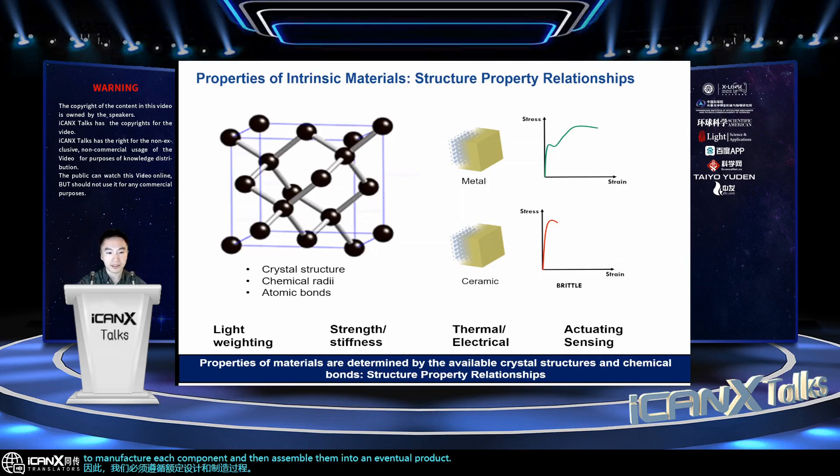And as such, we have to follow iterative design and manufacturing processes to manufacture each component and then assemble them into an eventual product. Okay, so what if in the future we don't have to be limited by these limitations? What if in the future we can start with any desired behaviors or properties that we want? So you can start, for example, by designing a load displacement curve for how you want a material to behave, or electromagnetic properties that change with time and space, and then leave the rest to computational design, artificial intelligence, and manufacturing processes that output a product that behaves exactly how you want it to behave. So how could that be possible?

That really needs us to develop manufacturing capability to assemble these three key elements. The first one is we need to have the ability to assemble materials into any desired three-dimensional topology. The second element is we want to have the ability to control feature sizes across multiple length scales. And the third and also extremely important element is we want to be able to assemble different functionalities or material classes into that digital platform. And that really comes into the concept of metamaterial.

So metamaterial is an engineered material that has properties that go beyond their raw materials. And then you can really define your own properties from these metamaterials. So it really feels like a fabric, as a continuum material, but you can define all these new properties that transcend the limitation of the raw material behavior.

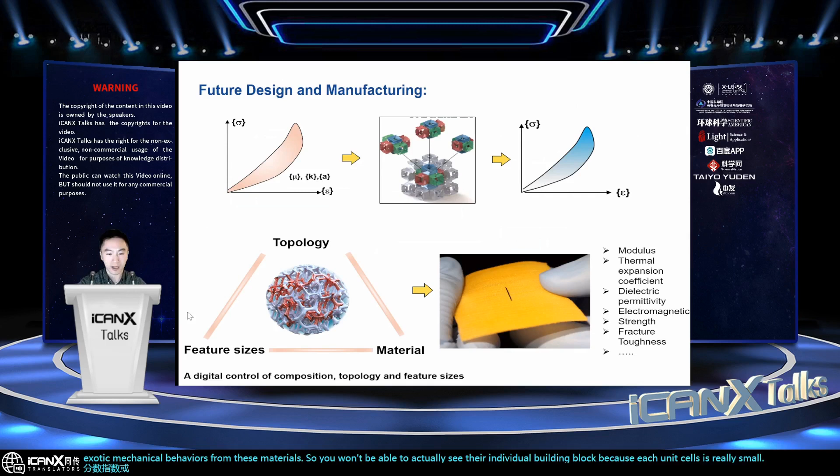For example, you can have negative thermal expansion coefficient, negative index of refraction, or exotic mechanical behaviors from these materials. You won't be able to actually see their individual building block because each unit cell is really small. So that's really the overall concept of metamaterial that has been developed in the past, I would say, 30 to 40 years.

And so our work really started with the field of mechanical metamaterials. This is the work that I developed when I was a postdoc at Lawrence Livermore National Lab. This was the first mechanical metamaterial that was ever printed. This metamaterial is ultra lightweight. As you can see over here, it weighs less than 10 kilograms per cubic meter.

This means it is 100 times lighter than water, but it is able to support more than 10,000 times its own weight, while having almost zero deformation as compared to a steel foam, which is much heavier than these microlattice structures, but already deforms, as shown here.

So these extreme mechanical behaviors really come from the internal architecture that we can design at the micro and nanometer length scale. The individual building block is a microscale unit cell. We call that a stretch-dominated mechanical metamaterial unit cell. It is designed in such a way that no matter how you load it from any direction, all the structural members will only carry axial stresses. That's how you can make a material really stiff.

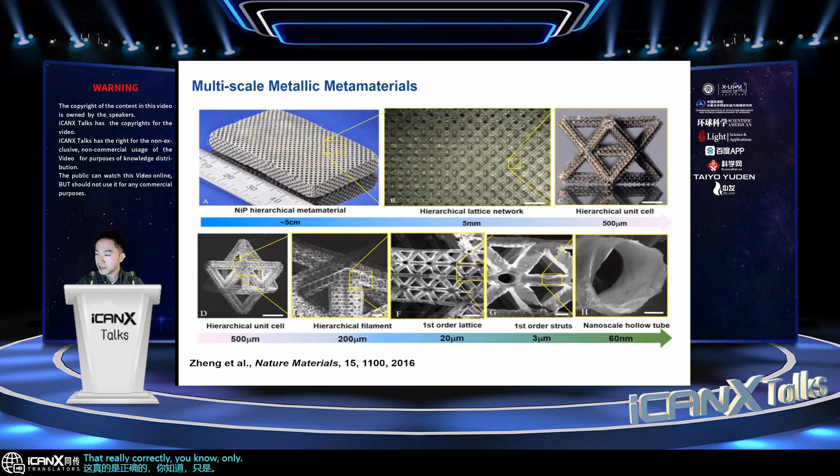The smallest length scale is a few microns, with feature sizes down to tens of nanometers of metal wall thickness. You can see this metamaterial is comprised of smaller metamaterials, and each smaller metamaterial block is comprised of an array of these stretch-dominated units. That collectively gives you not only rigidity, but also high recoverability over multiple cycles.

This is an example of a metallic metamaterial being compressed to over 90% strain, and you don't really see any fracture or plastic behavior. Unlike when you compress a can of Coke, this metamaterial can always recover no matter which loading direction you apply the force. This is the first demonstration of an ultra stiff but also recoverable metallic metamaterial.

This is really attributed to a collection of stretch-dominated designs over multiple length scales, and you can actually trigger different buckling loads at different length scales.

Okay. I'm sure most of you have heard the exciting talk given by Professor Joseph DeSimone from Stanford a couple of weeks ago on stereolithography-based techniques. There are all different 3D printing techniques that can make metamaterials. A light-based technique is one of the most suitable because it can give you small feature sizes and complex geometry. This is a technique that we developed at Lawrence Livermore National Lab. The baseline technique is projection microstereolithography.

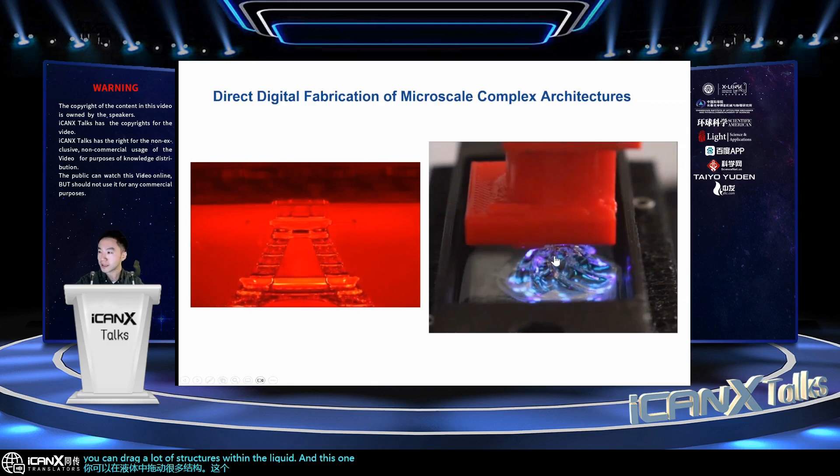Okay, so here's a movie showing the process. So you can have both bottom-up or top-down versions of this light-based 3D printing technology. So here's a top-down system where you shine the UV light from the top, and then you can actually use the elevator. So the elevator is the stage, and then you just lower it, and you can draw lattice structures within the liquid. And this one, similar to the CLIP technology that you see, you can actually lift solid lattice structures from bottom up.

So this is the baseline technique, but also in my lab, we really actively develop different embodiments of the technologies. We really focus on customization of these light-based 3D printing systems to make them process features across multiple length scales, as well as printing material that is highly viscous and functional. So it's one of the key focuses in my research group.

And also the ability to combine different materials, not only materials with different colors, different mechanical properties, but also materials that may come from different material classes or functionalities. So although the baseline technique can only process polymer, through advanced material feedstock synthesis or post-processing, you can convert this single material into other materials as well. So here's the polymer, but in that paper, we also show that you can do metal deposition and etch away the polymer, leaving behind metal lattices, or even graphene metamaterial.

So this is an example of a graphene metamaterial that one of my first PhD students, Rayne, demonstrated, where you start with graphene oxide and you print them into a green body, and then you do pyrolysis and burn them into a three-dimensional graphene architecture, where each ligament is comprised of woven graphene sheets.

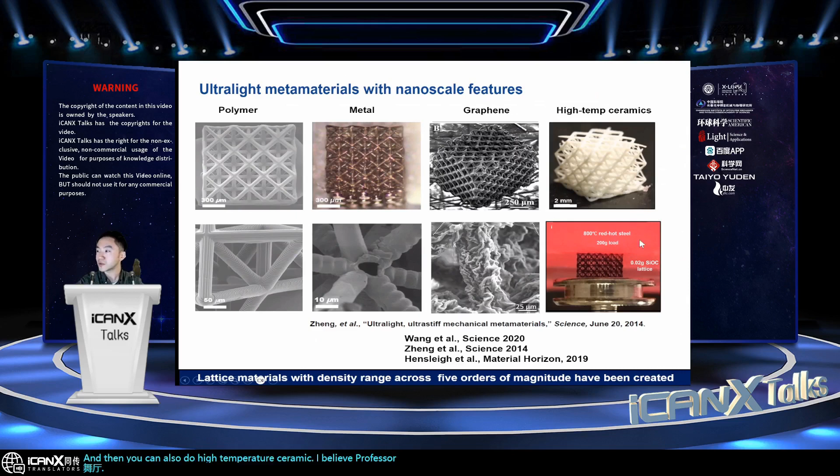And then you can also do high temperature ceramic. I believe Professor Joseph DeSimone also demonstrated the possibility with CLIP technology. So you can do silicon oxycarbide, silicon carbide, all different types of high temperature ceramic. So that is the baseline.

But we're also very interested in looking at how you scale up these metamaterials and what will be the eventual property limitations. And from an engineering practice point of view, how can you design metamaterials that have the desired failure load or fracture toughness? So this is a really difficult mechanics problem that has intrigued multiple mechanics people in the past 50 years.

So here's an example of probably the largest metamaterial that has ever been fabricated. So it's a metamaterial that, you look at it, looks like a cheese box, but it really has more than 10 million unit cells. And then we've been collaborating with Professor Vikram Deshpande from the University of Cambridge, one of the world's best mechanics experts.

So we're really interested in studying the fracture behavior of these metamaterials. So it is really important when designing materials with limitations. For example, what is the damage tolerance? If you have a crack inside the materials or any type of defect, how do they behave? So you really need an advanced tool to really visualize these failure modes.

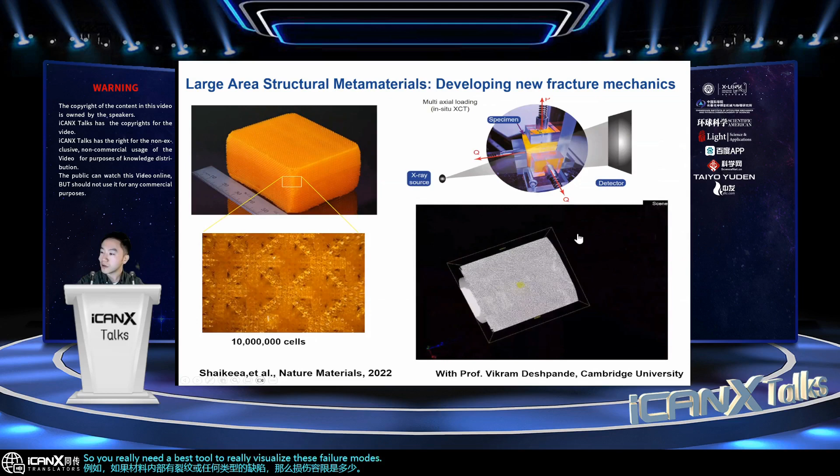So we collaborate with Dr. Vikram Deshpande very closely on really looking at the in situ loading, and then looking at how the crack can propagate and what are the failure modes and mechanics laws governing the fracture behavior of this metamaterial, and whether we can define new mechanics that define the failure behavior of this material.

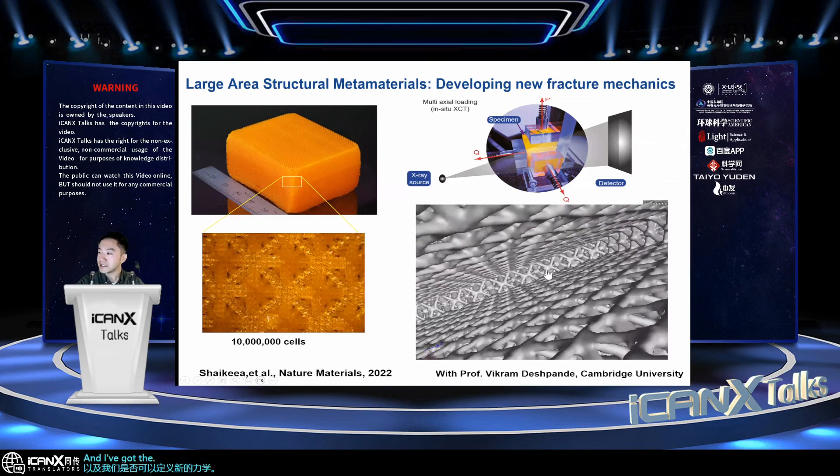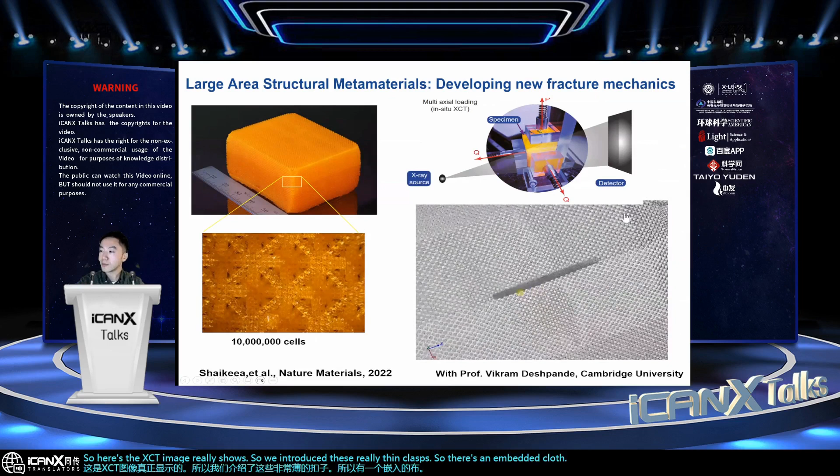So here's the XCT image that really shows, so we introduced these really thin cracks. So this is an embedded flaw that we introduced, and then apply uniaxial or triaxial tensile experiments and look at the failure mode. So long story short, we really observe very different and exotic mechanical behavior that you don't really see in continuum materials.

So one example being these metamaterials: we intentionally made the raw material, which is the base polymer, to be an elastic brittle material. So an elastic brittle material is a material where, when you have a crack and you load it, it will fail catastrophically. But what we really observed lately is they really don't fail catastrophically.

So they experience an R-curve behavior, which is similar to the bone in our body or a biomaterial. So with a biomaterial, when it has a flaw and you try to stretch it, the crack will not propagate immediately, but the crack will actually change its shape and display a really ductile behavior.

So we're really intrigued by this study, and then realized you can see that these metamaterials, despite being made out of brittle material, actually have a very strong ductile behavior, meaning that the crack does not really catastrophically propagate. It actually keeps changing its shape and adapting. So this is a new work that we have recently submitted.

And in the earlier work, our collaborator, Angkur, who is also now a professor at the University of Cambridge, and also my student, Huachen Cui, who has graduated from my group and is now assistant professor at Hong Kong University of Science and Technology, we have figured out a design criteria for these types of metamaterials. So eventually, when you scale up from a few microns to meters or tens of meters level, what are the failure criteria governing these mechanical metamaterials?

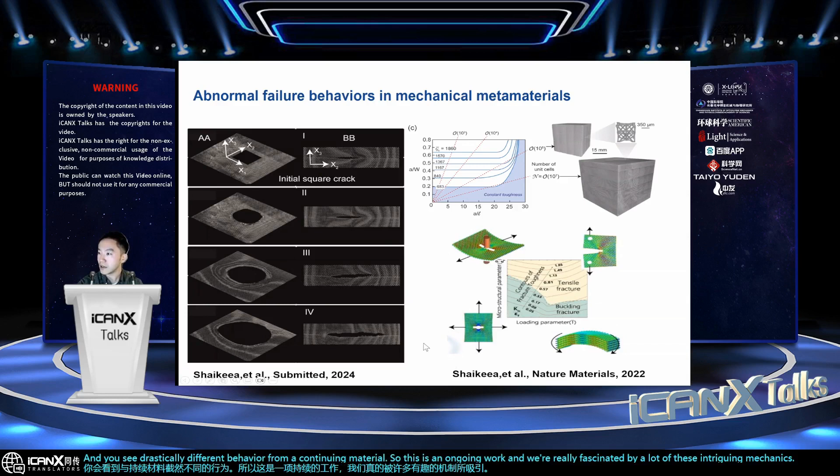So we can also introduce mesoscale control within these hierarchical metamaterials. For example, you can also introduce carbon fibers. So here's a setup that we have developed that allows you to scale up these metamaterials to meter level with microscale features with embedded carbon fiber.

And recently, my postdoc, Qi Chen, has also achieved the alignment of these micro carbon fibers within these metamaterials so that in each ligament, you can have these fibers aligned in 3 dimensions, meaning that all these fibers can be aligned along the axial direction of these trusses so that you can maximize the mechanical properties as well as tailor their anisotropy of stiffness at different loading directions.

Okay, so the real benefit of these mechanical metamaterials is the design opportunities. For researchers who have been investigating mechanical metamaterials, you see that these metamaterials, when you load them, have really interesting mechanical behavior, and that mechanical behavior for any material is displayed by its stress strain curve. And for mechanical metamaterials, with this topology design, you can have really interesting exotic stress strain curves

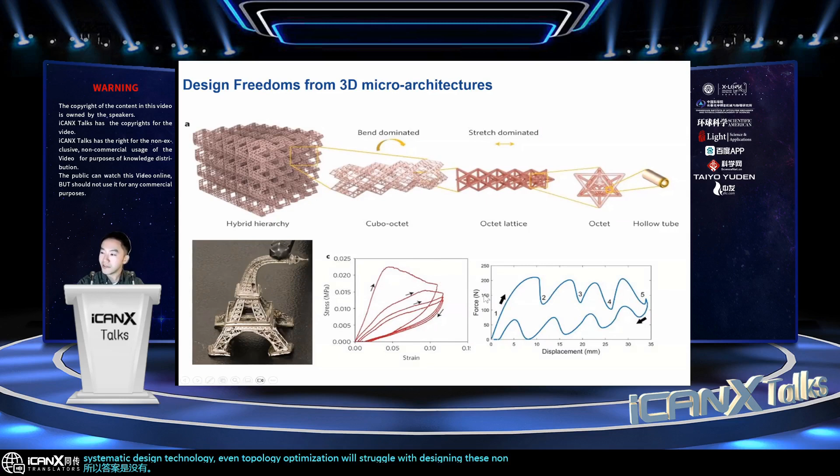and tailorable energy absorption behaviors. So then the question is, with unlimited design possibility across multiple length scales, how can you actually design them? The answer is there has been no systematic design technology. Even topology optimization will struggle with designing these nonlinear mechanical behaviors. So we resort to machine learning to design metamaterials. This is the work that my postdoc Chen Hua first investigated.

So our concept is you start with the designer. Let's say the designer is a front-end engineer or a customer. You come up with your desired mechanical behavior. So let's say you can draw a stress strain curve, which can also be a force displacement curve, of the material behavior you intend to have.

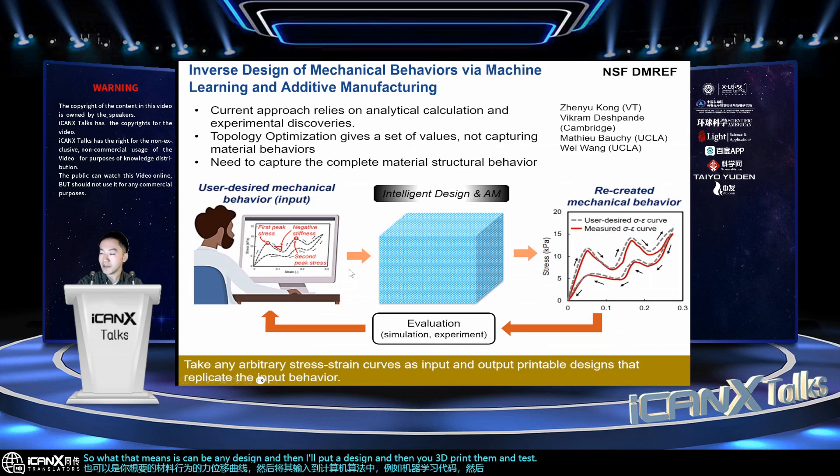And then you input that into a computer algorithm, for example, machine learning code, and then output a metamaterial. So here I just draw a block. What that means is it can be any design, and then it outputs a design, and then you 3D print them and test them. It can actually replicate the intended behavior. So we leave the rest to machine learning development.

So currently my postdoc Marco has been leading this project on designing a graph neural network. This is a multidisciplinary and multi-university collaboration that I lead with UC Berkeley and UCLA to use graphs. A lot of people have been using graphs to represent molecular architecture, but here we actually use these graphs to uniquely represent the geometry and the topology of metamaterials.

So here the graph is a really unique mathematical language, and we find out that you can actually use the node feature and the edge feature of the graph to represent the entire information of metamaterials in terms of their geometry, the topology, even the material and the density of metamaterials. So with graphs, you can come up with any random architectures by placing the nodes and edges, and then iterate them and construct a neural network.

Then you can train the surrogate model, which gives you the prediction of any of these graph models, and eventually achieve the inverse design of metamaterials. Here are some of the examples. So we can not only do metamaterial design at low frequency quasi-static response, but also high loading rate, as well as even dynamic properties and acoustic properties.

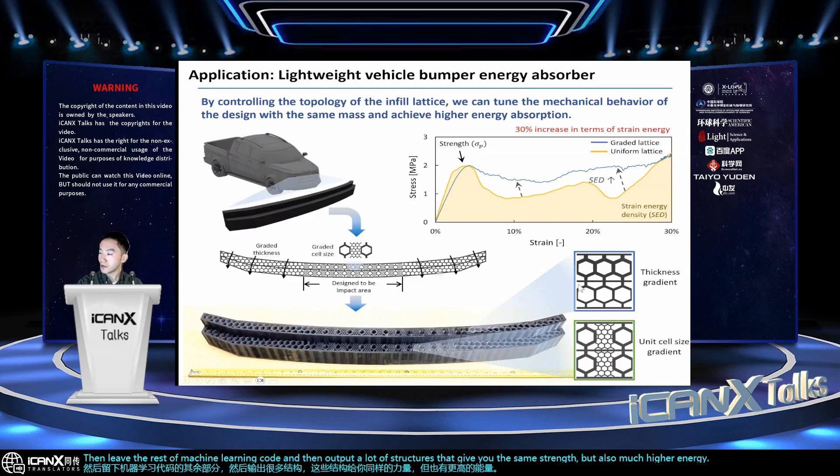What you really want when the car hits a pedestrian at a high loading rate is to minimize or keep the same strength, the stress, so that minimal stress is transmitted into the human body, but have really large energy absorbed by the car bumper. So here you look at the stress-strain curve from a baseline design, tailor the shapes, then leave the rest to the machine learning code, which outputs lattice structures that give you the same strength but much higher energy absorption. My student Zheng has demonstrated the prototype in our lab.

Okay, so that's enough about the structural materials that I want to talk about today. Now I want to switch gears a bit to look at how we can go beyond mechanical metamaterials and structural applications. This is actually true for additive manufacturing in the past two decades. Most additive manufacturing approaches have focused on structural materials: metal, polymer, plastics, and ceramic or composite at most. But it is really difficult to combine functional or electronic materials into additive manufacturing. That's because you always have to introduce a binder, the material that can be shaped, which gives you a trade-off in material functional properties. So there's a trade-off between manufacturability and functionality.

So we have been at the forefront of developing exotic functional or electronic materials into the building blocks of metamaterials. And we are excited to explore what happens when you combine different functional or electronic materials into the three-dimensional architecture of the metamaterial: what are the new design spaces, functional behaviors and even applications that you can derive from this layout.

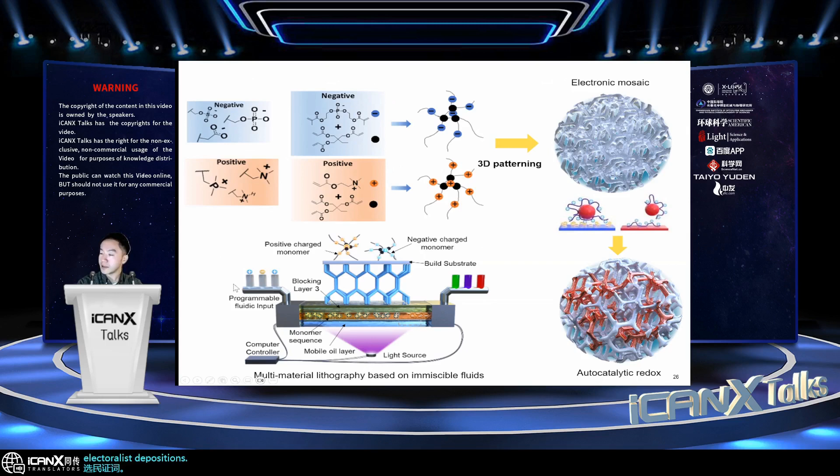So this scaffold is really a three-dimensional assembly of electrostatic charges at each different region. You can have negative charges or positive charges. And then you can use them as a scaffold to attract different material depositions. So here's an example where you can use this opposite attraction principle to attract different material plating. So it's eventually a selective volumetric electroless deposition. And then you can carry them out with our multi-material platform.

And here are examples of three-dimensional architectures you can do with this technology. For example, this Eiffel Tower, you've probably seen before from Professor Joseph DeSimone. But here, within this Eiffel Tower, at any location, you can have a different material. So for example, at a selected region, you can have a metal layer. It can be any metal: copper, nickel, silver. The example here is a nickel dielectric architecture.

This is a gyroid architecture, an interconnected dielectric material, which is the polymer here, and then the nickel phase, which gives you this interpenetrated inorganic and organic material combination.

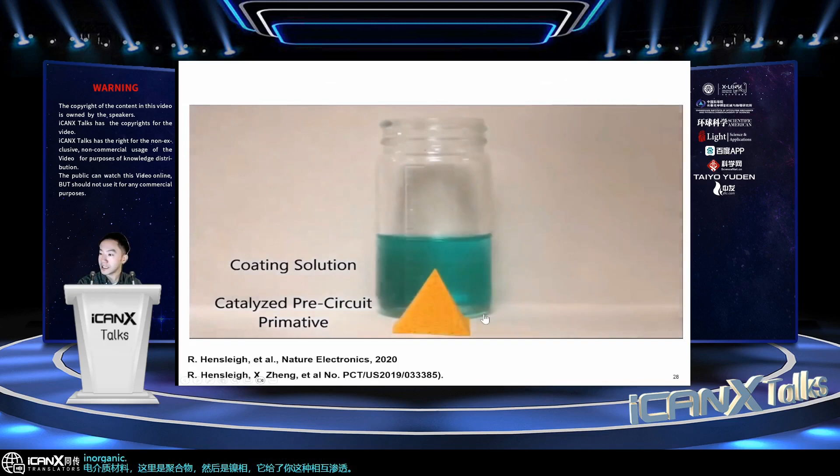And here I show a quick movie of the platform. You start with a 3D printed material that carries these charges, and then you put it into a solution. This is any conventional electroless plating solution. And then within a minute, you take it out, and you get a nice three-dimensional circuit pattern. So this is the interconnect we show on surfaces with any topological complexity. And you can do this really fast; it only happens within a couple minutes.

So it's not only compatible with metal, but it can be applicable to other functional materials: oxides, magnetic materials, or some semiconducting materials as well, even carbon nanotubes. This really gives you the ability to make building blocks comprised of different materials. You can tune the conductivity distribution in 3D, as well as the dielectric constant distribution in 3D.

So when you have alternating dielectric and conductive phases, one immediate application that we have thought about is electromagnetic wave steering, which is electromagnetic metamaterials or microscale antennas that can operate at gigahertz frequencies. Most antennas used today in your cell phone for communication are basically used to collect radio waves and then send those radio waves in different directions as you wish.

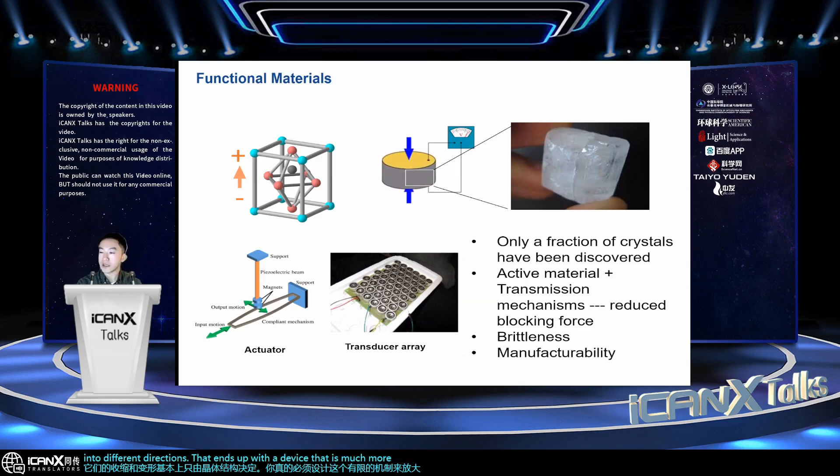So unfortunately, this material is extremely brittle and hard to fabricate. And as such, when we use them, we are limited by these base material properties. You have to make an array of small piezoelectric discs for different applications, for ultrasonic applications, for sensing, relying on arrays. Or if you use them for actuation, because their contraction and deformation is basically only dictated by the crystal structure, you really have to design a compliant mechanism to magnify the displacement into different directions. That ends up with a device that is much bulkier, and you have really limited degrees of freedom to work with.

Yeah. So now we're looking at, okay, what if we can actually introduce these piezoelectric nanocrystals with three-dimensional architecture, such that you can design architectures that go beyond these natural crystal behaviors. Here I showed examples of just a few crystal structures from nature of these piezoelectric crystals. This is pretty much what you can do with natural piezoelectric materials. So what if in the future we can design any arbitrary piezoelectric crystal tensors?

And first, you really need the ability to construct these piezoelectric building blocks into a metamaterial architecture. And then you really need to develop a fabrication printing technique to allow you to do that. So we have been working on this technology for at least the past 5 years, and we have figured out a way to make high quality piezoelectric materials.

So it started with a large quantity of these PZT nanoparticles, and you functionalize the surface and bind them with UV sensitive monomers, and then make it into a photocurable ink, which is basically a highly concentrated piezoelectric ink with these piezo nanoparticles in between our UV sensitive monomers, which basically serve as a binder. Then you can use your 3D printing technology to print them.

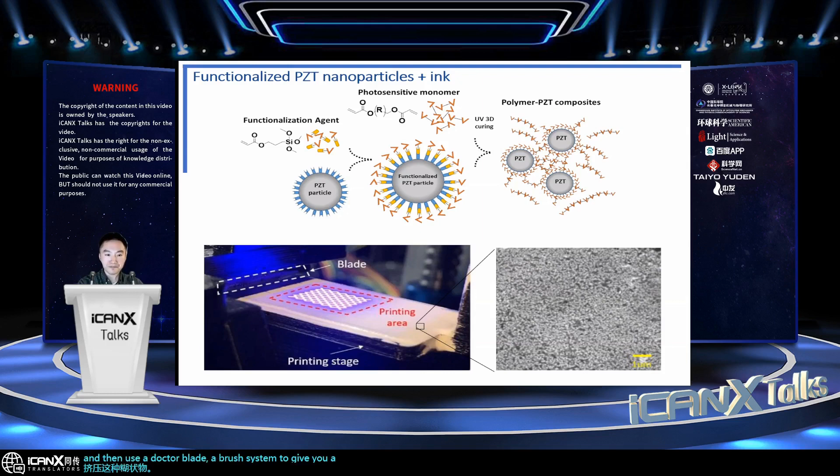So this makes this material really viscous, which gives us a lot of challenge to use a stereolithography-based system to print them. So we have to come up with a hybrid approach, which is you have to use a nozzle to squeeze this piezoelectric paste. So it's basically like a toothpaste. You squeeze this paste and then use a doctor blade, a brush system, to give you a really uniform layer of this piezoelectric colloid, then shine light on top and make your layer by layer fabrication.

So an example shown here: my student Hao Tian has introduced a liquid phase sintering technique that allows us to prevent a lot of lead from evaporation. And so here's the example of a post-sintering technique that we have developed that allows you to achieve very high density piezoelectric material post-sintering.

Combined with that, we also introduce an alignment approach that allows you to align these piezo crystal texture seeds into the material. And after templated grain growth, you can achieve a really high piezoelectric coefficient. Here's among the highest that we have achieved using this 3D printed textured ceramic. So this is really approaching piezoelectric crystal, and outperforming piezoelectric ceramics that you can even buy commercially. And then you can print them into any shapes and use them for both actuation and sensing applications.

So for the rest of the time, I'm going to talk about several energy conversion behaviors using these types of metamaterials. The first example I want to talk about is sensing. Sensing is a phenomenon we can use for metamaterials, which is to convert stress, mechanical deformation, into electric charges. So with these three-dimensional piezoelectrics, here's the example we show: if you print them into a cubic dimension, all these three blocks look exactly the same to you, right? But it's their internal architecture that we design that differs here.

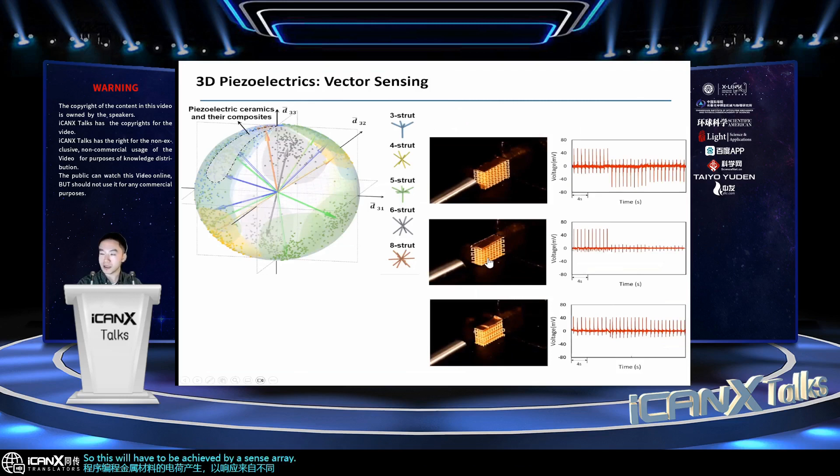So basically you can program the charge generation of metamaterials in response to forces coming from different directions. This would have to be achieved by a sensor array in current technology. But with metamaterials, you can just have one material building block and use it to give you a map of force distribution in 3D, not only the magnitude, but also the directionality of the force.

So this is the work of my past student Hua Chen, who is now a professor at the Hong Kong University of Science and Technology, and Zheng, also my senior PhD graduate, who developed these flexible piezoelectric metamaterials. You can tailor the polymer to be really flexible, and then with the piezoelectric and selectively deposited metal, make them into wearable structural materials. You can call them wearable electronics, but I also want to call them wearable structural materials with functionality.

So you can put them into a boxing glove. You don't want to do that, but my undergraduate students worked on this as a senior design project to make them into a boxing glove. What they demonstrated is that you put it into the boxing glove, you punch somebody in the face, and then you can read the real-time distribution of force magnitude along your palm, giving you the force at every individual pixel from these piezoelectric metamaterials.

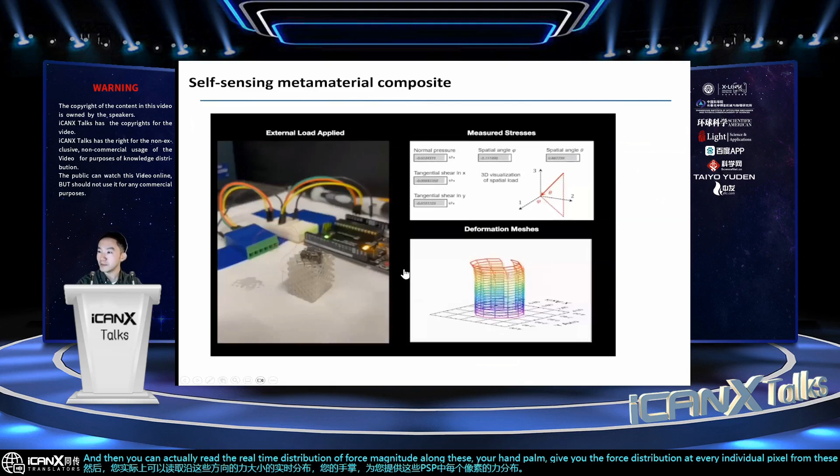So recently, my current PhD student, William, also demonstrated a self-sensing metamaterial composite. It's basically like an artificial fingertip; he tapped it from different directions, and you can measure the forces. This metamaterial can self-sense deformation in any direction and trace its shape when the fingertip is being deformed. So you can measure the shear force, the frequency, the normal forces, as well as the entire shape of the metamaterial being deformed.

Okay, so that's the sensing, which is the receiving capabilities I want to talk about. Now I want to talk about emission. So emission basically describes the property of metamaterial to convert electric voltages. So you supply electricity, and then it will emit vibrations. The vibration can range over different frequencies. One example here is ultrasound vibrations or low frequency vibrations.

So here we actually adapt these technologies. We've been collaborating with medical doctors at different universities on this technology. This is an example of a stent. People insert a stent into a catheter and insert it into the patient. But now we can also introduce piezoelectric materials locally. We can do coatings or print the whole piezoelectrics along each ligament of the stent, and then they can serve dual functions.

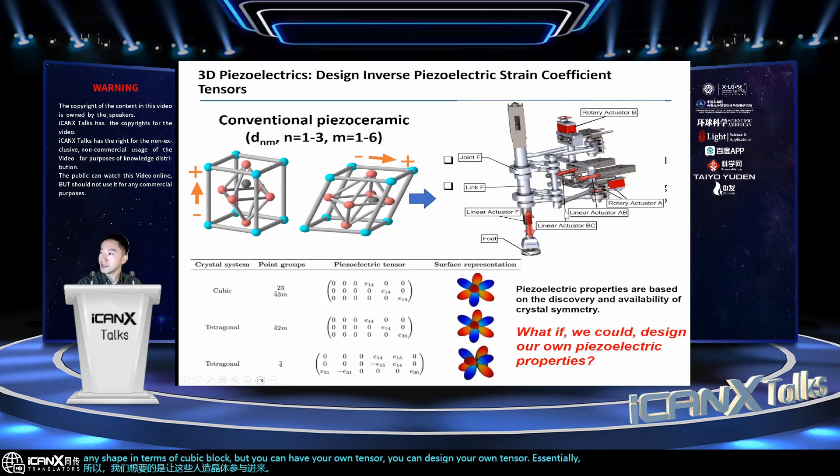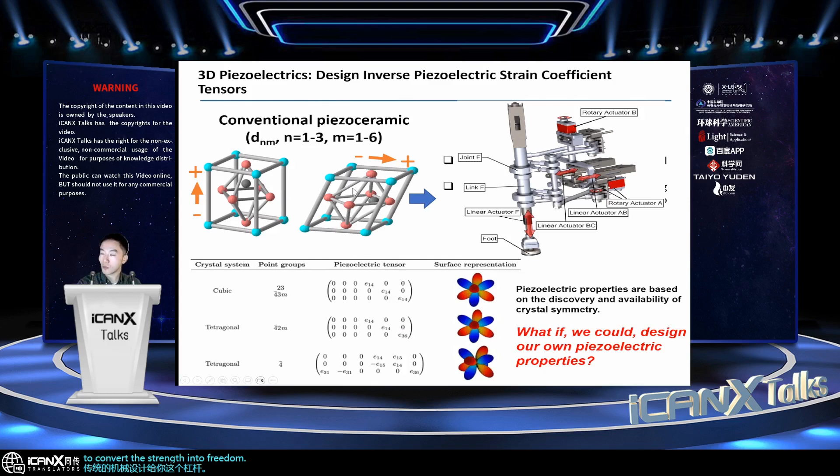You can design your own tensor in such a way that you don't have to use complex traditional mechanical design to give you levering to convert the strain in different degrees of freedom. This metamaterial itself will be capable of generating strain in different directions.

So this is from the work that my first PhD student, Huachen, demonstrated along with our collaborators: we can design metamaterial topologies by arranging the orientation of the piezoactive materials, as well as the passive structural phase, which can be the non-polarized ceramic phase, and conductive phases, to make a three-dimensional metamaterial architecture that can display all the different tensors you want to have.

So it's essentially an inverse design approach that allows you to tessellate the ligaments spatially in 3 dimensions, and you can also tessellate them in different coordinate systems, giving you a metamaterial building block that can convert strain in different orientations. I'm not going to talk about the detailed design; if you're interested, you can look into our paper published in 2019. This shows that you can achieve all different piezoelectric tensors, which really give you actuation properties.

So the same building block shape is a cube. If you apply a voltage, it can generate either pure shear or pure twist or a combination of deformations in different degrees of freedom. And we measure them experimentally. Here's an example using laser vibrometer measurement to measure the deformation of these metamaterial blocks.

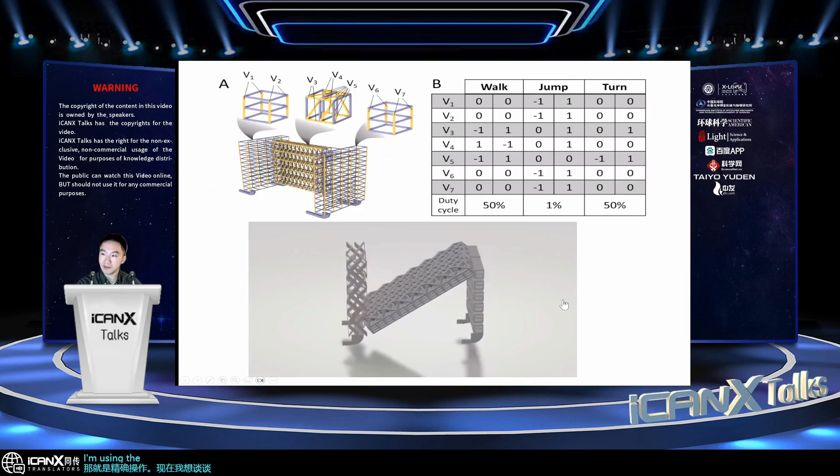Now I want to talk about using them as robotic metamaterials. This is the concept we coined based on this metamaterial technology. You can basically have these unit designs and just tessellate them, and the material itself will become a robot without having to combine all different robotic components, as you have to do in a traditional robot. You just assemble them, and then they will be able to walk and be actuated based on the different deformation modes that you can activate by assigning different voltages.

You can also assign different functionalities. For example, have a certain region of these piezoelectric metamaterials be responsible for sensing. You can sense physical touch, tactile sensations, but you can also assign a focused piezoelectric element to emit ultrasound for sensing.

So here's an example of the piezoelectric metamaterials. Here's the locomotion we demonstrate. The entire building block is a micro robot as small as a quarter or a penny. They are able to do straight motion, turning, and jumping over an obstacle. And remarkably, they can also do sensing.

So here's a stimuli-responsive micro metamaterial robot. As they walk, we have a basket that can carry and sense a remote object being dropped on top of the metamaterials. And then you can program decisions into these metamaterials. They can make a turn, immediately stop, or escape. These are all attributed to the dual functions of these metamaterials, being able to sense but also being able to actuate.